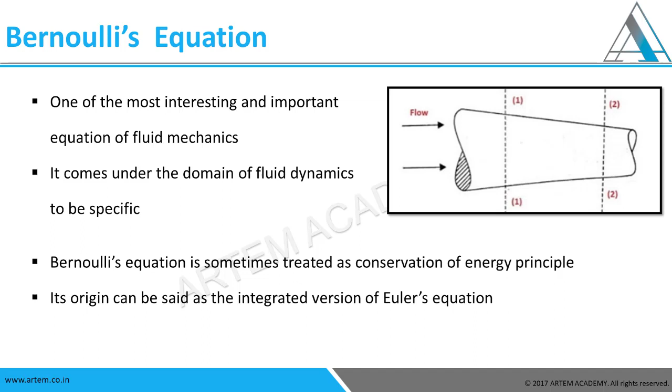Its origin can be said as the integrated version of Euler's equation. Euler used the same equation but it was not integrated. Bernoulli moved one step ahead and integrated that equation and presented it in front of us so that we can use it and we can satisfy the conservation of energy principle.

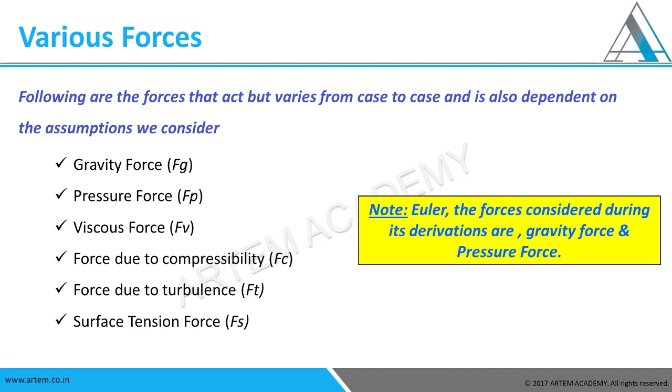Now, various forces. Following are the forces that act, but vary from case to case and also depend on the assumptions we consider. These are gravity forces, pressure forces, viscous forces, force due to compressibility, force due to turbulence, and surface tension force. Note that in today's overview we would talk only about the gravity force and the pressure force because in the derivation only those two forces have been considered. And that's why we are discussing forces, because I told in the previous slide that it comes in the topic of fluid dynamics, and in dynamics we are concerned more about the forces that are being applied on the fluid.

Continuity equation. Before discussing Bernoulli's equation, it's very important that we discuss the continuity equation because it's one of the most fundamental equations and it is usually coupled for problem solving with Bernoulli's equation. It represents mass conservation. So as we can see, continuity represents mass conservation, Bernoulli represents energy conservation. So using that balancing, we try to solve the problem. It helps in solving problems with Bernoulli's equation.

At one section, if some amount of mass is going in, then at the other section, that same amount of mass should come out. And that's very fundamental, right? The mass cannot get lost somewhere. It has to be accumulated, it has to be accounted. And that's how the whole continuity equation works.

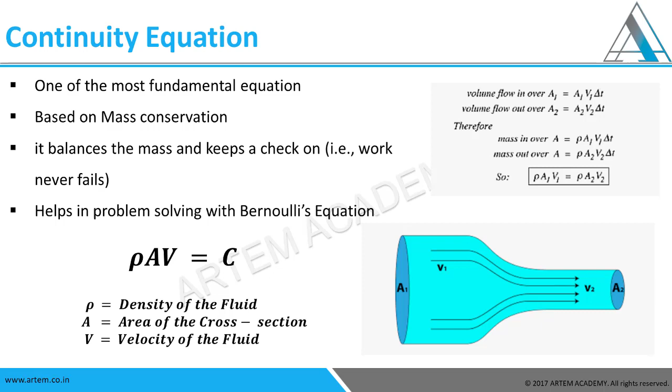Before moving to Bernoulli's, let's look at some assumptions as well. So flow is considered on a streamline. The fluid is assumed to be steady, steady as in it does not change with time. Effects of irreversibilities, viscous forces and friction are not considered, because in the previous slide I told you that we are not considering any friction force or shear force. That's why we are not talking about irreversibilities and viscous forces.

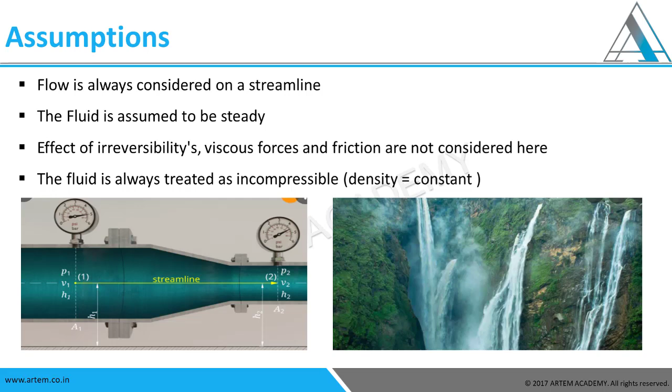The fluid is always treated as incompressible. It means that the density is not changing. So these are the four basic assumptions that we are talking about and that we will be using, because it sets the boundary so that we do not make any mistakes.

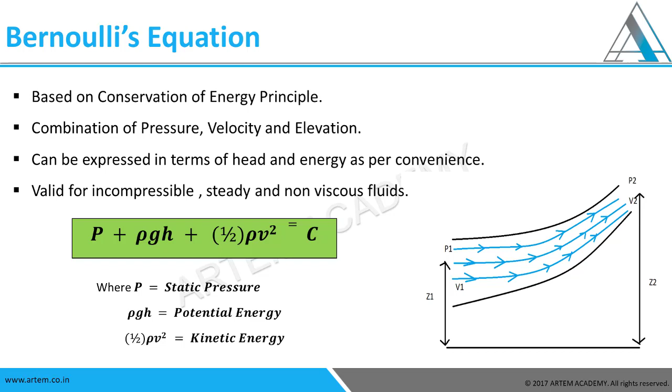So as you can see on your right, there is a pipe that is moving from the Z1 height to Z2 height. So what are the energy changes that are going to happen in the individual components? We are going to look at how the static pressure is going to change, and obviously we are seeing that height is going to change, so how the velocity would react to it. And this is how the whole thing is, that energy would be conserved, but let's look at the points where pressure would be either increased or decreased, or the velocity will either increase or decrease. That is how.

Now let's look at the applications. These are the applications you generally find: orifice meter, venturi meter, lift generation, swing of a golf ball, pitot tube, dams and turbines. Orifice meter and venturi meter are almost the same, because they are used for measuring the flow rate, the discharge. Orifice meter is not that sophisticated, venturi meter is a sophisticated instrument. But in that also Bernoulli's equation is used to determine the pressure, the velocity and everything.

In lift generation, we generally use Bernoulli's equation to find how the pressure is less above the wing and the pressure is more below the wing. And that is how we calculate the lift generation. The swing of the ball also happens with that, because of its rotation, a low pressure is created above and high pressure is created below, and that is how it gives a lift and sometimes gives a swing to it.

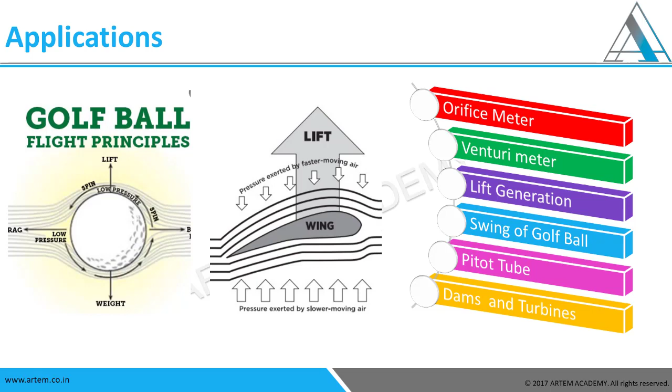Now talking about the pitot tube, it is generally used to find out the velocity of the air through which it's moving, and that's why Bernoulli's equation is used. Dams and turbines do not need any introduction, because if we talk about the Pelton wheel also, there is a huge penstock that comes and there is a height, so we need to calculate what is the velocity when it comes down. So it all happens with the help of Bernoulli's equation.

Now where not to use it, that is also very important, you should know where you can't use Bernoulli's equation: when Mach number is greater than 0.3. Why am I saying that? Because when the Mach number is greater than 0.3, the fluid tends to become compressible, and for compressible fluids the equation is not valid, because we are assuming density to be constant.

When the duct or the pipe is too narrow, the friction would increase a lot. That is fLV²/2gD, that is the formula that we use. So the friction would increase so much that it would become considerable, and that's why we cannot use Bernoulli's equation. In diverging sections of the ducts or the pipe, there can be a flow reversal. The pressure can reduce severely, and that would cause a lot of eddies in the pipe, and that will make friction increase again. In the turbulent region, same reason, the friction would increase a lot.

Near the boundary layer also, boundary layer is the region where we see shear forces, where we see a thickening of the fluid, and that's how we can say that there also the friction is in great amount. We can't use Bernoulli's equation. Also, last but not the least, when the temperature change is very significant, the values of the density also change, and that's why it no longer remains incompressible but becomes compressible, so we cannot use it.

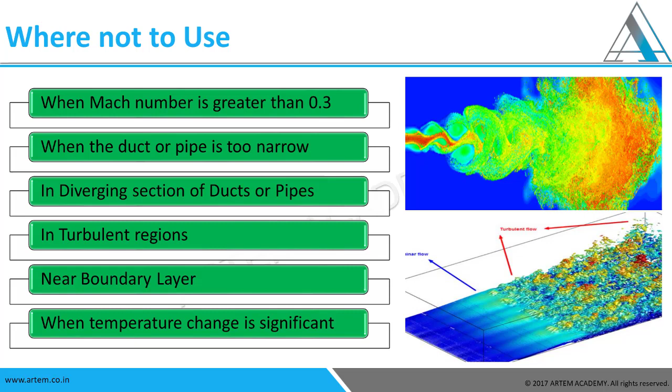Now some points that you should keep in mind while learning Bernoulli's equation: it's valid only for inviscid flow, it's valid for incompressible flow, it represents conservation of energy. For rotational fluid, it is valid along the streamline of the fluid, and it cannot be used when friction appears in high amount. If you keep these points in your mind while using Bernoulli's equation, I hope that you would never make any mistake.